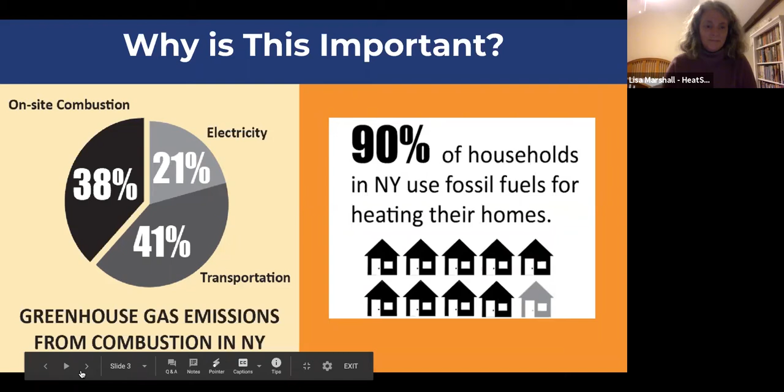So we have sort of three basic categories of recommendations for people to look at their home or building. The first thing we ask people to do is to really look at your building envelope. And that's because no matter how you're producing your heat, or your air conditioning, if you have air conditioning, you don't want it to just go right out the window. So having a look at your building envelope, the insulation in your walls, in your basement, in your attic, are all very important. And also air sealing, which is different than insulation. Insulation is like wearing a warm sweater, but if the wind blows, it blows right through that sweater.

So you need air sealing, which seals up all the cracks and crevices that allow that air to go in or out of your home. And the second recommendation, and sort of the thing we're going to talk about the most tonight, is for our space heating and also our cooling. What we recommend is the technology of heat pumps. And there are two basic categories of those: air source and ground source heat pumps. And we'll spend most of the time tonight talking about that.

The third category that we want people to look at is your domestic hot water. It isn't the biggest thing you do in your house, but it is about 20% of the energy use in your home. So it's really quite well worth looking at. And especially because with a heat pump hot water heater, there's great incentives now to install them. So it's kind of the biggest bang for your buck. If you're not ready for a new heating system, or you just can't get one right now, even just switching out your hot water heater can make a really big difference. Okay.

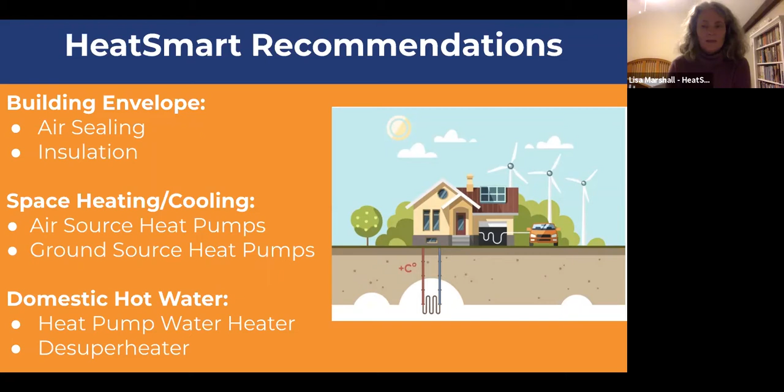So heat pumps, that's the main topic tonight. And what is a heat pump? This is sort of a very simple schematic of a heat pump, but a heat pump is a pretty simple piece of technology. And everybody on this call has a heat pump already in their house. It's what keeps your refrigerator cold. And you might have noticed, I used to be amazed by this as a child, that the back of the refrigerator is very hot and the inside is cold. And that's because that heat pump is pumping the heat energy out of your refrigerator.

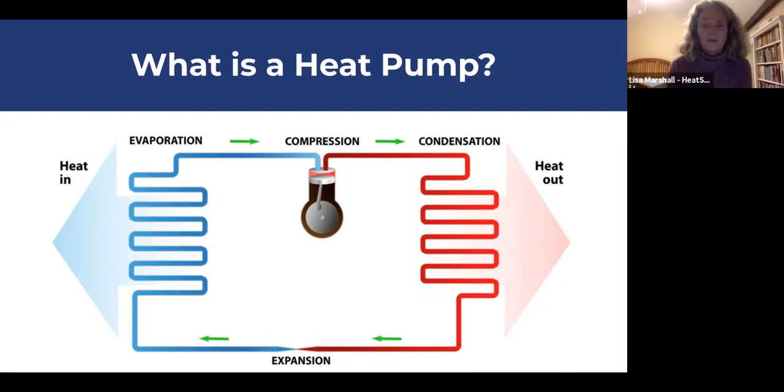So you can use that same technology, a refrigerant loop that goes through a condensation and evaporation cycle to either absorb or expel heat. And that can be reversed for air conditioning, which is why heat pumps are great for heating, but also provide excellent air conditioning.

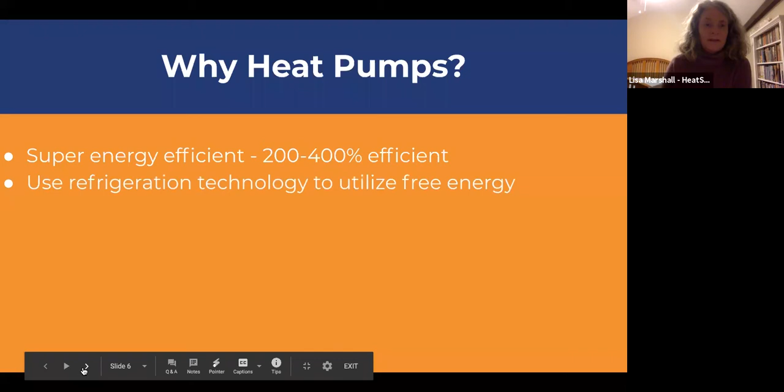So why heat pumps? What's great about them? They are super, super energy efficient. They are 200 to 400% efficient. And that's because they're taking the heat energy that already exists in the air or the ground, and they're using that to heat up your house or your hot water. So they don't have to create that heat energy like you do when you burn something. And that's where all the efficiency is found. They, as we mentioned, use refrigeration technology to utilize this free energy.

They will heat your homes in the winter and cool in the summer, as I also mentioned before. They also dehumidify: when they run the air in your home through this refrigerant cycle, they are also taking moisture out of the air, which here in upstate New York is a big deal, as you all know. Heat pumps can be used to heat your hot water, so not just for your space heating. They can improve your indoor air quality, something that all of us should be thinking a lot more about these days than we ever did before. And even before, indoor air quality is actually a really big deal for people's health.

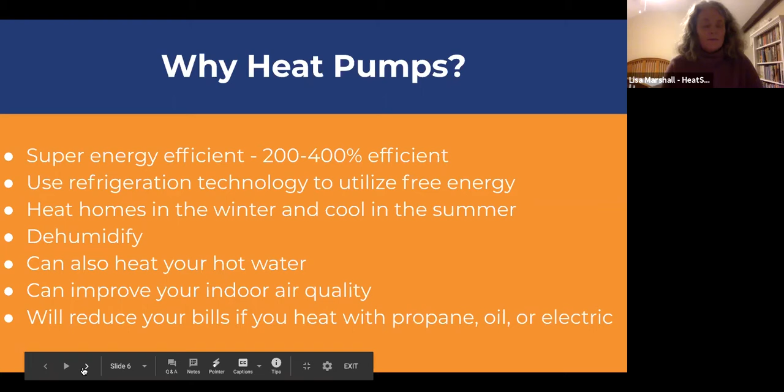And if you're currently heating with delivered fuels like propane, kerosene, or oil, or electric space heaters, a heat pump for your heating is going to drastically reduce the cost of heating your house. Okay, so the topic tonight is which is right for you. And of course, that all depends, but I'm going to talk to you about what the different kinds are and what some of the considerations are for figuring out which one is right for you. So as I mentioned before, there's two basic kinds of heat pumps: ground source heat pumps, sometimes called geothermal, and also air source heat pumps.

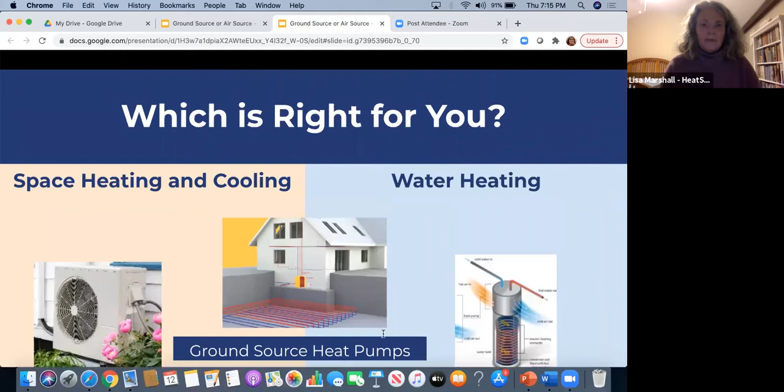And why is this doing this? Okay. Nope, I don't want to do that. I just want that little thing in the bottom to go away. Why won't it? I don't know. Okay, so sorry about that.

So ground source heat pumps take the heat out of the ground. You have some kind of a heat collecting mechanism, whether it's horizontal or vertical loops that go down into the ground, and beneath the frost line, the ground stays at about a constant 50 degrees. So there's heat energy there to be collected. And they bring that heat energy back into your house, and that's how they heat your house.

And they can also be used to heat your hot water. Air source heat pumps here on the left take heat energy out of the air and put it through a refrigerant loop, and that is how they heat your house.

So why are they less efficient than ground source heat pumps? Well, because sometimes the difference between the cold air outside and the temperature you want your house to be is a big delta. So they have to work harder to get the heat in your house up to the temperature that you'd like to live at. And there are also heat pump hot water heaters, so that you can heat your water with those.

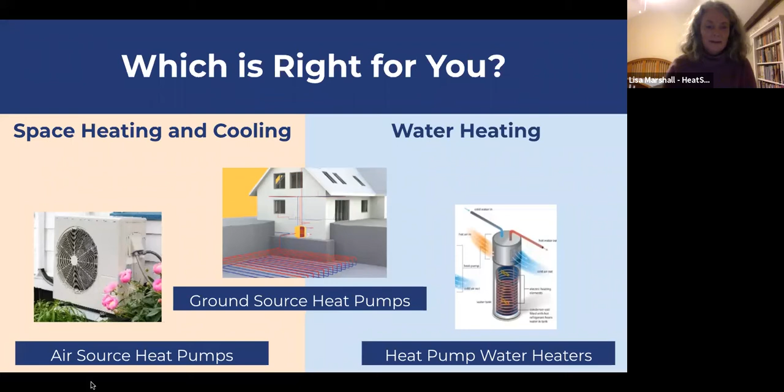So what are the considerations when you're trying to decide? For most of us, budget is a pretty big consideration. Generally speaking, but not always, air source heat pumps are going to be cheaper than ground source heat pumps to install. However, that is not always true. So it's definitely a consideration, but you shouldn't assume that that's necessarily the case for your house.

And the second factor is your goals. What is your main goal? Is it that you want something installed right away? Is it that you want something that is going to be the best solution for climate change? Is it that you want the best possible air conditioner?

So your goals matter. Carbon reduction: ground source heat pumps are more efficient than air source heat pumps. So if your biggest concern is climate change, you might be leaning more towards the ground source heat pumps that are going to reduce carbon even more than the air source heat pumps.

Your lot and your landscaping. This is a big deal. When you put in ground source heat pumps, you need to put in some kind of heat collector into the ground. Either this means big, long, deep trenches dug in your property where they lay the loop field, or it means a drill rig comes on your property and drills down 500 feet to put a borehole.

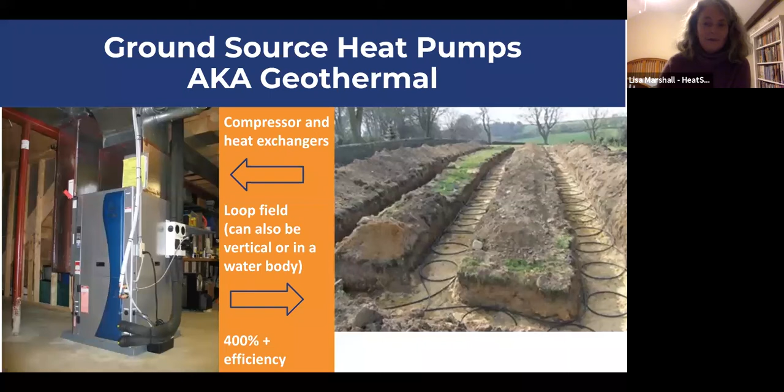They can go from a whole house to just your garage, basically. And you see a lot of these around town that people just put in for air conditioning. And that's kind of too bad, because if they put in the cold climate heat pumps, they would get the air conditioning, but they would also get heating. And although the cold climate heat pumps cost a bit more, we have rebates for them. So after the rebates, there's really not a difference. So it's unfortunate that more HVAC installers don't understand and promote these units as whole home heating solutions. So they're also quite efficient, but not as efficient as a ground source heat pump.

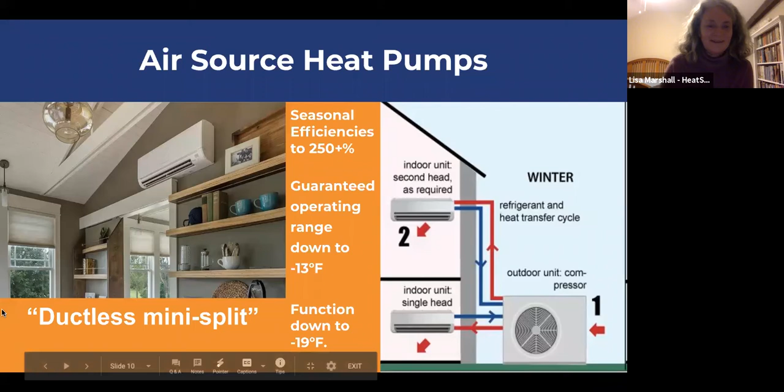And if you're currently heating with propane, oil, or electric baseboard, you're going to see drastic savings right away if you put in one of these systems, so it's incredibly beneficial. For those of us that heat with gas, you can make a lot of good reasons that you might want to switch to a heat pump, but you can't just say it's going to save you tons of money. It's not, with the current price of gas. What we know, though, is that the current price of gas is artificially very low, and it can't stay that low. So you're still going to be ahead with a heat pump for sure.